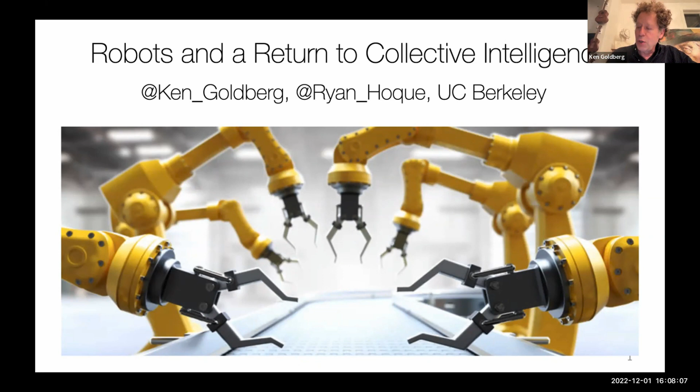About human-machine collaboration. We'll start by noting that when you have two or more people who work together to solve a problem, we call this collective intelligence. What Ryan and I would like to do today is share some recent ideas about how this can be extended to robots.

I want to reference the history of robotics. The word robot itself, as most people here know, was coined in 1920 by the playwright Karel Čapek. The play, R.U.R, Rossum's Universal Robots, was actually quite successful. It played all around the world.

The idea was that you had many robot workers who were oppressed and joined forces to rebel against the human directors of the lab. This was an early example of where the very first robots were working together. There was a sense of collaboration or collective intelligence among the robots.

I want to note that actually the first real robots were also collaborative in the sense that they always had a human working behind the scenes. So they were what we call tele-robots. It's important to make that distinction between a robot and a telerobot. The telerobot is not autonomous, it has a human driving it. This goes all the way back to 1898, when Nikola Tesla introduced the first radio-controlled robot boat in Madison Square Garden.

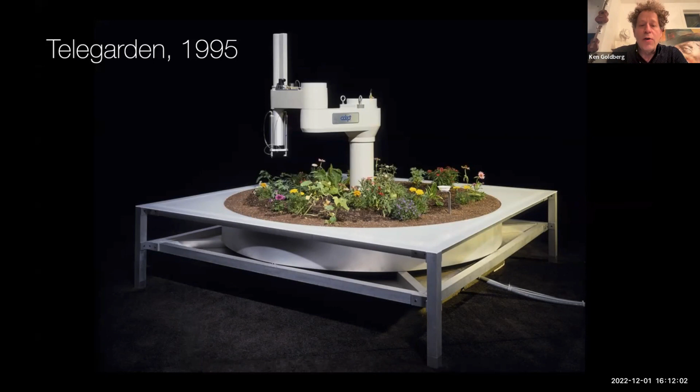This was an art project that was online for 9 years. It provided an interface for the early version of the World Wide Web, the Mosaic browser, so people could go in and view the garden by clicking.

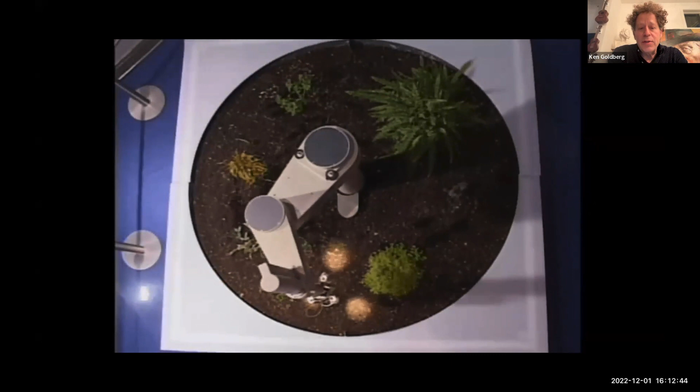On the left is an overhead view of the robot's workspace, and the camera was at the end of the robot. So if you clicked on different points, the robot would move and show you what was underneath. You could also water the garden, help us water the garden. And if you go to the next slide, you'll see that...

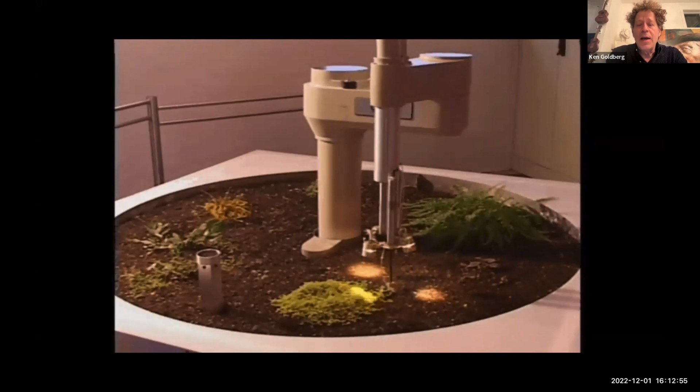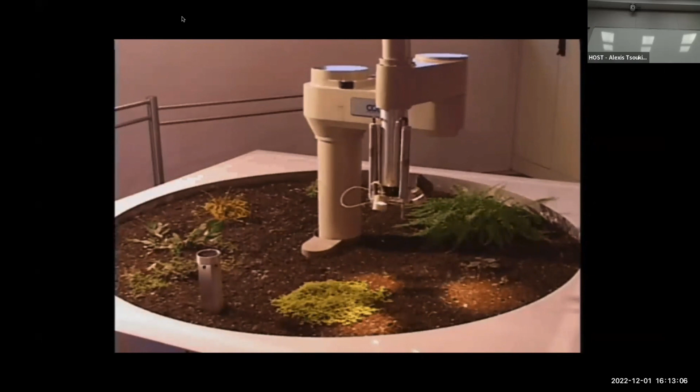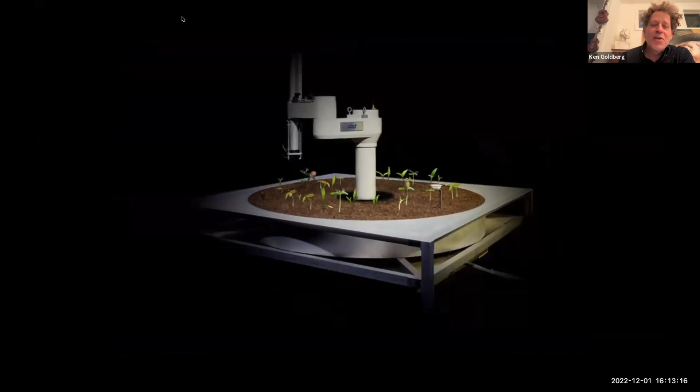Oh, excuse me a second. There's some strange music playing. Very odd. Okay. There's some kind of strange intelligence in this room. So, but what happened with this robot? Oh, I'm sorry. Hold on one sec. I must have said Alexa in there somehow, but Alexa turned on.

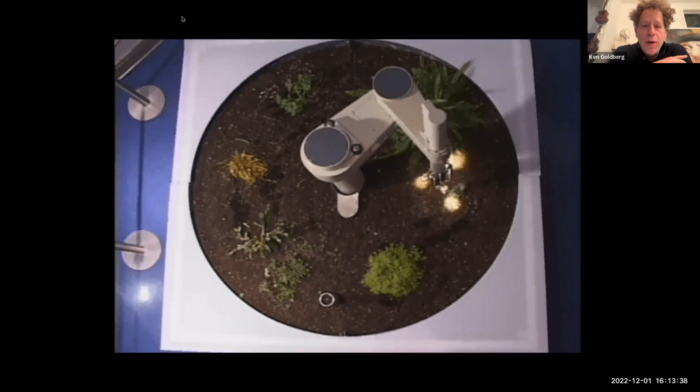Okay, so next slide. What we were interested in was, next slide after that, Ryan. This philosophical question that came up there in the context of whether or not the robot and the garden were real.

And I don't want to get us off track. That was not the question we want to talk about today. But an interesting philosophical question for us was what is the distinction between virtual reality and distal reality. This question is even more relevant today as computers and technology have advanced, making simulations so good that it's hard to distinguish between something virtual or fictional versus something distal, where it's a real environment just far spatially. This is really the essential problem of deepfakes in an early version.

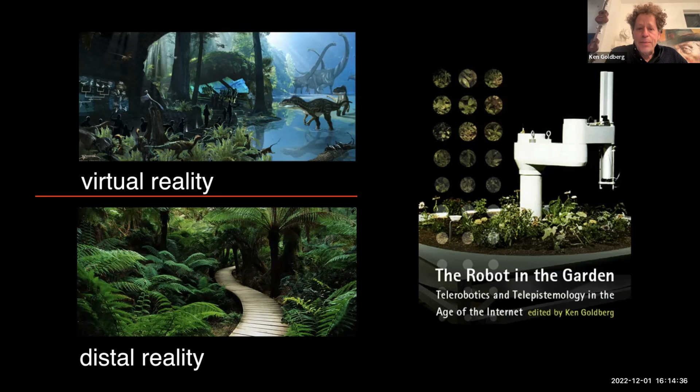So next slide. We extended this because we were so inspired by the response. We extended this to something we call the tele-actor. Here, instead of the robot, we replaced the robot with a human. This was deliberate—we wanted that human to be an actor, ideally even a performer, because we wanted someone very gregarious who enjoyed interaction with people and environments.

The key there was that there'd be many teledirectors online who could essentially look through the eyes of the teleactor as he or she explored an interesting environment, like backstage at the Academy Awards or on the sidelines at the World Cup. So there'd be one teleactor walking around, but many people looking through the eyes and making suggestions.

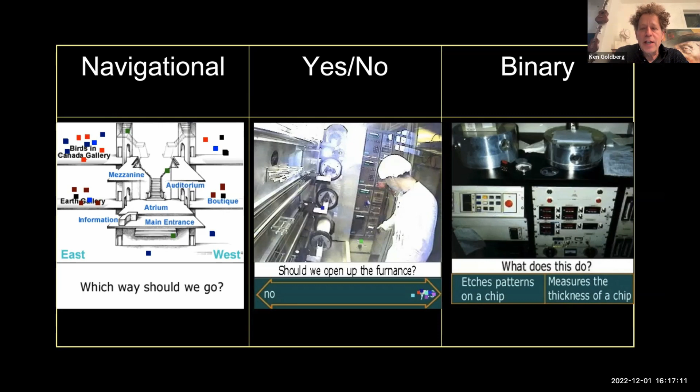There's obviously been quite a bit of work since then, but the idea here is that these robots are fully autonomous and they have no real essential need to interact with others.

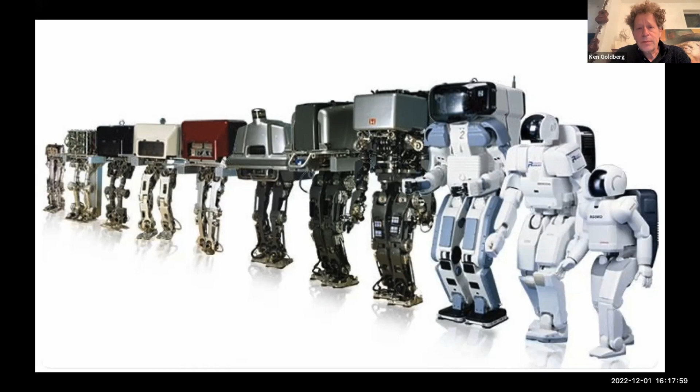Now there's been another trend which we're excited about: cloud robotics. That is where robots are increasingly in locations where they're able to connect to the internet and work with remote data centers or remote robots to collectively share experiences and learn over time. Robots can be located in many different environments, like many different homes, and they'll be able to upload data, examples of interactions that they have, which could be used collectively to improve performance for the collective over time.

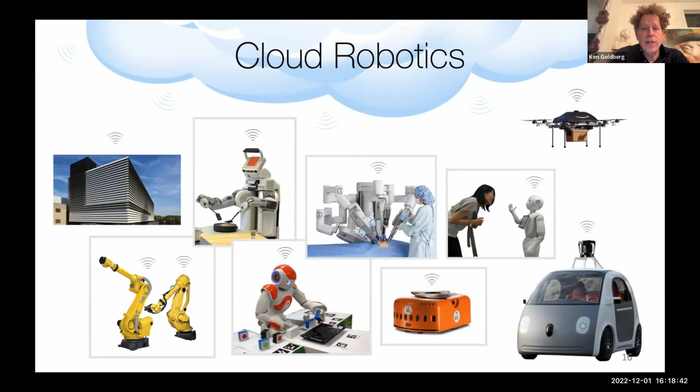This has been accelerated by the major developments in deep learning, which over the past decade has really accelerated because the key aspect of deep learning is the need to have vast amounts of data, of examples.

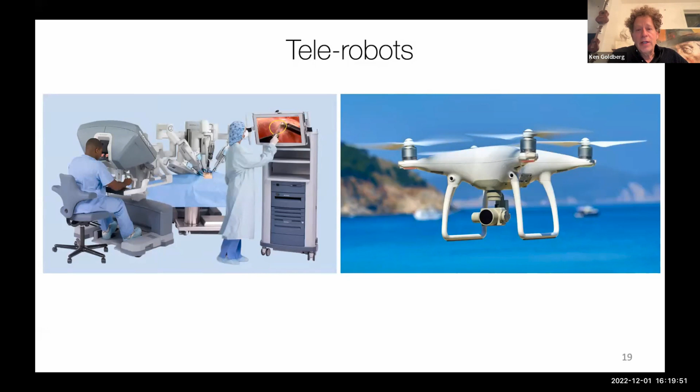The one other major development we're seeing, obviously, in the last three years has been the pandemic, and that has affected the field of robotics. There's been a huge proliferation of telerobots, because telerobots are very capable of working and much less capable of being contagious. Telerobots have already been under development for things like telesurgery, but that has increased. And drones have really been a huge success story in the field of robotics. Again, those are teleoperated.

And there's also a renewed interest in this for the home. Amazon introduced the Astro robot, which is, again, a telerobot that's operated by remote control.

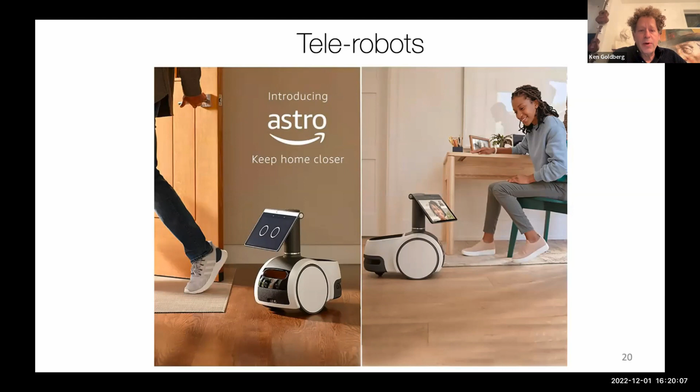This is very relevant to the developments in autonomous driving. Waymo, a branch of Google, introduced autonomous taxis in San Francisco recently, and the taxis only operate at night and only in very certain areas of San Francisco. I should also mention that the dirty little secret is that they only make right turns, so if you want to get from point A to point B, it usually takes twice as long as normal. But one of the features is that they do occasionally get stuck.

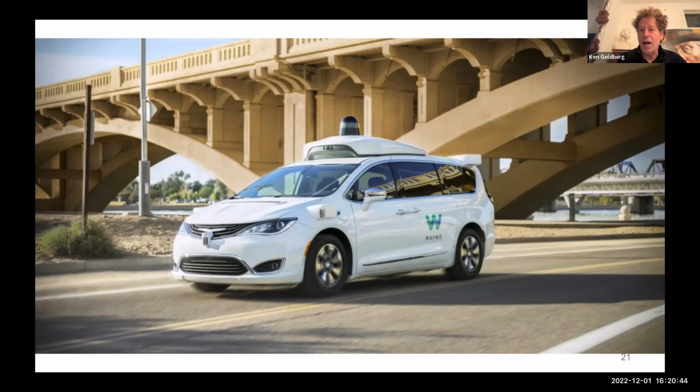As you'll see in the next slide, there's a human operator standing by. This is interesting: you have a human who can basically be alerted and called in when the robot encounters a situation it can't get out of. This is being adopted, we believe, by all the self-driving car companies, that they make use of this as a fail-safe, as a fallback.

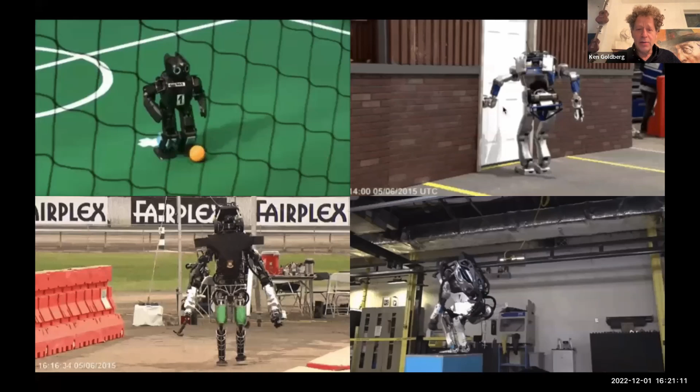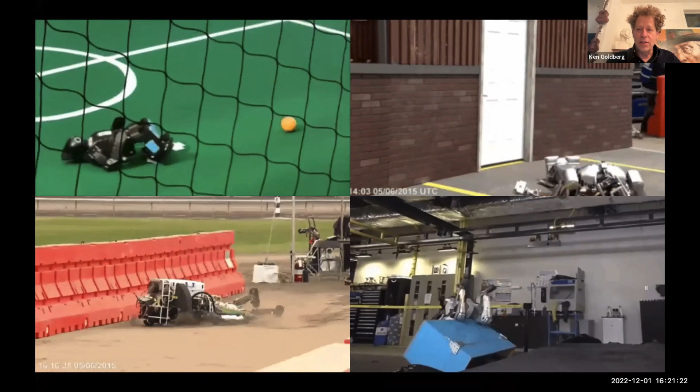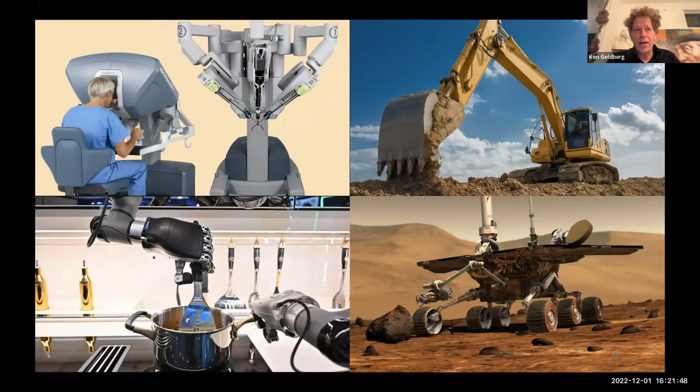Robots are being used increasingly in many remote applications. And so we need methods that are able to manage the trade-off between robots acting autonomously and robots under telerobot human control.

This shows that this trend of human in the loop is very prevalent. As you see in these examples here, Amazon is also using something similar for robots in its warehouse.

I like this quote from Elon Musk lately. He originally started to build the factories for Tesla cars entirely autonomous; he wanted no humans in them. But after a year, two years of really struggling, he relented on that, and he actually admitted making a mistake here. It was a great moment, and as you can see, it was right on Twitter: he said excessive automation at Tesla was a mistake, humans are underrated. So we agree with that.

So I'm going to turn things over to Ryan, who's going to talk about some really exciting new research that he's been developing on how this trend we see can be applied very specifically to a problem in imitation learning. Okay, Ryan, over to you.

Okay, great, thank you Professor. So first I want to talk about imitation learning. Imitation learning is this idea that has obvious relations to human intelligence, where we often learn from examples, whether that be from our teachers, parents, mentors, even videos on the internet, as this baby that's imitating Rocky.

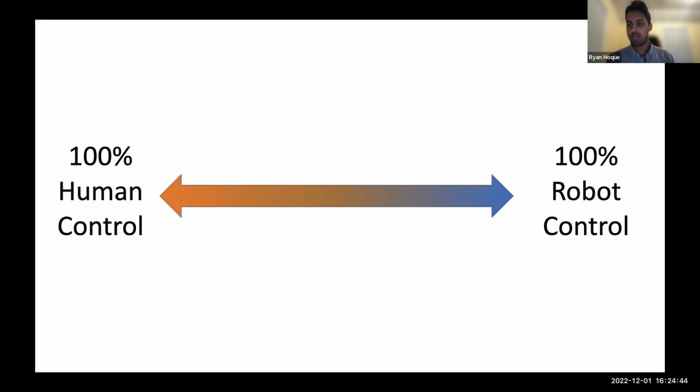In the middle, there could exist all kinds of autonomy solutions, and here we could call this supervised autonomy, where the robots are as autonomous as they can be, but when they need help for whatever reason, a human can step in and operate it as a tele-robot. That's the trend we see in companies like Waymo, Amazon, etc., for logistics and self-driving automation.

Now, a couple of nice properties of supervised autonomy. One is that it can approach more robot autonomy over time, continuously, rather than trying to get there all at once, because the robots can always learn from their own mistakes.

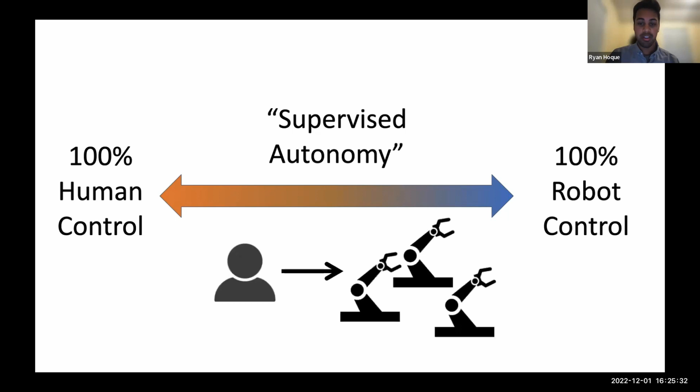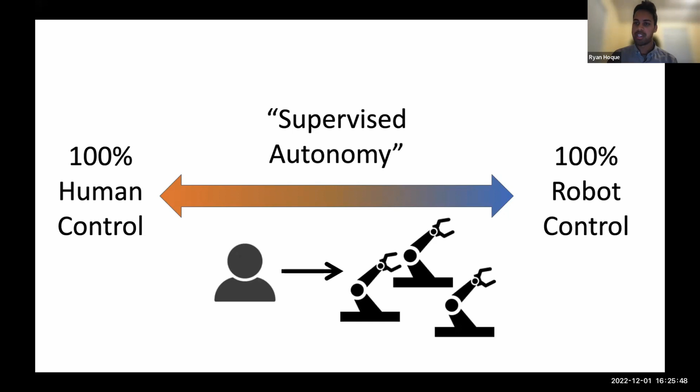The other nice property is that if we're clever about how we allocate an individual human's attention, then a single human could be allocated to multiple robots. Say each robot is 90% robot control and 10% human control, then one human should be able to monitor 10 robots, in the ideal case.

In the literature, we call these algorithms interactive imitation learning. The idea is that there's some switching function, call it pi, that determines at each stage whether the human or the robot should be in control. There's a popular algorithm called dataset aggregation, or DAgger, from 2011, which pioneered this idea.

What happens is that you intermittently cede control while the robot is doing its task and give control to the human -- that's why this makes it interactive. This allows the robot to see how to do these little recovery behaviors from the states it actually visited, and return to states where it knows what it's doing because it's seen a lot of human data.

The central question here, of course, is how do we choose pi? How do we determine what the switching function is? There's been a lot of work recently in this area. People are very excited about this now because it's not obvious how to do this, and it's an open problem. There's been a lot of great work here.

One way people think about it is called human-gated. The idea is that the human is the one who determines pi. They watch the robot continuously do its task, and then decide, oh, it needs help here. I'll step in, take over control, and then give it back when I think it's okay. This often works very well, and it's very intuitive.

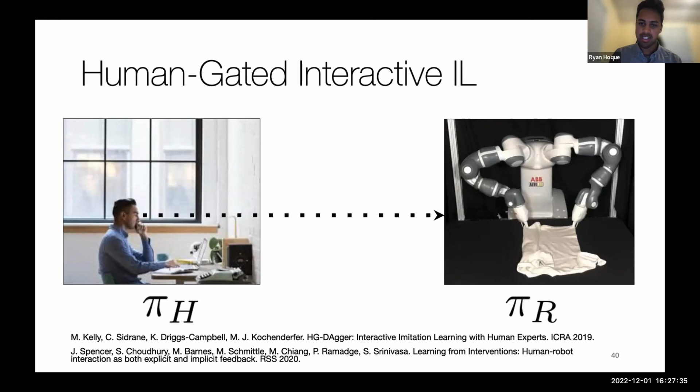But the main drawback is that it's not scalable. If you have a lot of robots that a single human must operate, or a lot of robots per human, or even just a really long period of time, this human will get tired or overwhelmed by monitoring so many robots at once, and inevitably make some kind of mistakes.

So the alternative to this family of algorithms is called robot-gated. And as the name suggests, now the robot is the one that is determining autonomously that it needs help for whatever reason. And that, again, leads us to the central question: when should the robot ask for help?

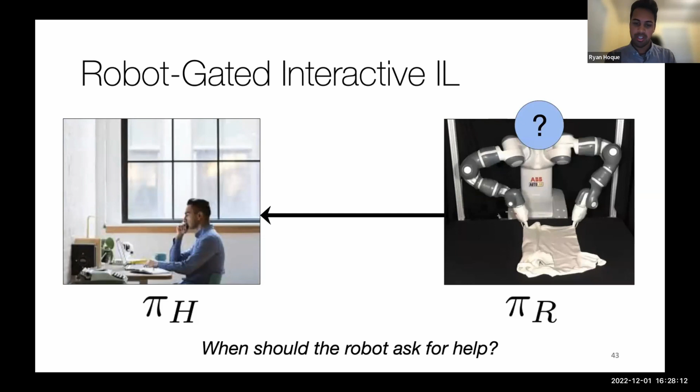So our answer to this was something that we called ThriftyDAgger. And ThriftyDAgger was a paper that we presented at the Conference on Robot Learning in London last year. And the idea is this. So think of an autonomous car driving in various conditions. So say it's a sunny day and it's just on a highway. Then this is a case that is neither novel nor risky.

And what I mean by this is that novelty, we'll say, is some new situation compared to all the data you've seen before. While riskiness in this case is, are you going to get into an accident? And if you've had a lot of data on the highway in sunny conditions, then this is neither novel nor risky because you've seen it before and you're probably not going to crash. However, if you're driving on snow for the first time, then this is both novel for your system and also risky because you might careen off and hit a tree or something like that.

And our insight in this work is that often we think of these two terms as the same for robots, but really they're off-diagonal terms, right? So there are states that are novel but not risky. For example, like a wide open dirt road. Maybe you haven't seen it before, but there's nothing to crash into. And there are also states that are risky but not novel. So say you're driving a tight cliff, even if you've done it before, maybe you don't trust the system to get that perfectly right. Otherwise, the consequences are very severe.

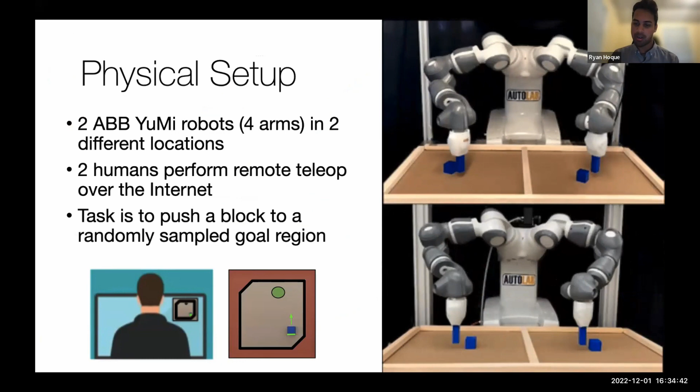In physical experiments, we had to get a little more creative about how to get a robot fleet with academic lab resources. And we turned these 2 ABB YuMi robots into 4 robots, where each arm is acting as its own robot. And there were 2 humans available on the internet to take over while it did this image-based block pushing task. And we observed similar results here as well.

And quickly, some dirty laundry limitations of this. We had several modeling assumptions, such as the humans had to be homogeneous and the robots are all independent and not acting as a swarm in the same environment. And these are some interesting directions for future work.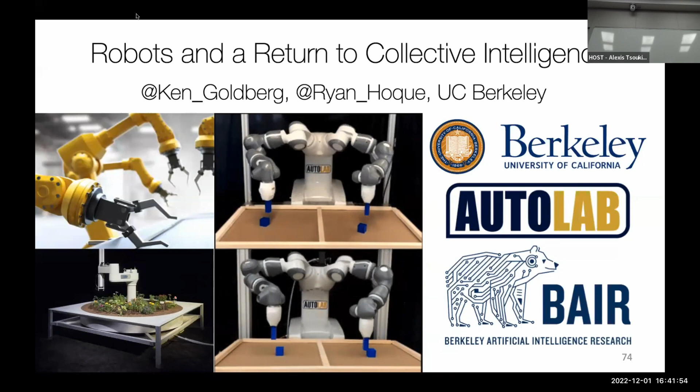If I can add, I really like the question, and I think you're right about the role the human has in these situations: setting up the environment, and choosing the task. So the task that you see here with the pushing of blocks, we actually spent a lot of time on. Oh, we can stop the screen share.

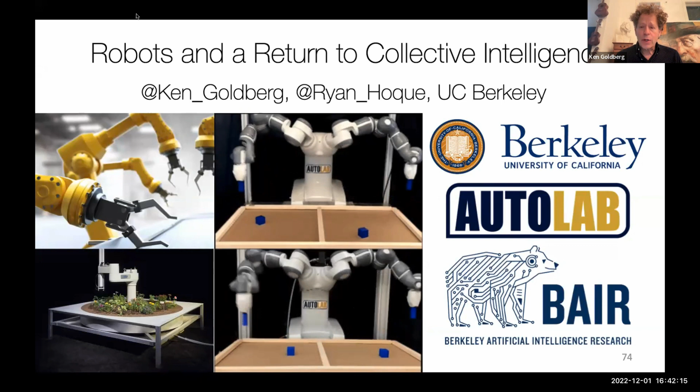Okay, thanks, Peter. The task of pushing those blocks, Ryan actually spent a huge amount of time thinking about and crafting, because we wanted a task that essentially could operate in a self-supervised way over long duration. So it had to be a task that doesn't need human intervention every cycle.

So what he does, just to get a little more detail there, is that at every point the system automatically selects a point in that grid, and the robot has to push the block to that point, and then it generates a new point. So this can basically run for hours and hours on its own, and occasionally it gets stuck, and that's where the human comes in. But it's exactly as you said, it was a very careful crafting of a problem that was well matched to the algorithm.

So I think you're exactly right. I like what Ryan said about system 1, system 2 thinking, that's a nice way of thinking about the complementarity. The idea is that they don't have to be real time, that in some sense you could have a sequential process. What we like to think of is that we get to a point where these robots could run for hours or days without human involvement.

Maybe batch up some examples that they can self-recover, but they could batch up failure modes that the human could come in and look at, say, once a week.